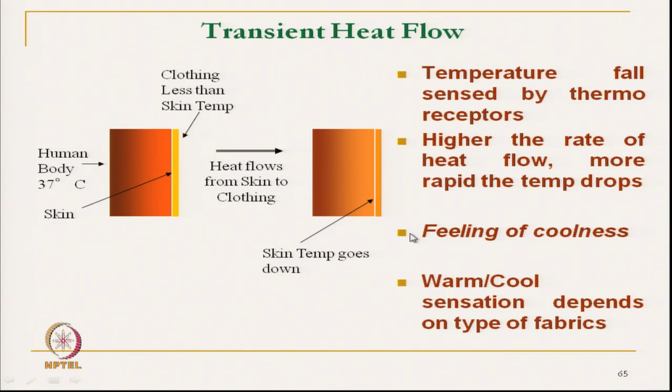If there is instantaneous heat flow, we feel cool because the temperature of our skin goes down. The rate of change in temperature resulting from flow of heat from skin to a clothing material at low temperature - the clothing material has to be at low temperature, otherwise we will receive heat.

When brought into contact, it is determined by the thermal inertia of the material. If the thermal inertia is low, then we will not feel cool. It is the material characteristics - there are many other characteristics.

The thermal inertia is a function of density of the material, specific heat of the material, and thermal conductivity of the material. If your thermal inertia is high, then we will feel cool.

If the material's temperature is lower than the skin temperature, but the thermal inertia is not high, then we will not feel cooler. Thermal inertia is a function of density, specific heat and thermal conductivity of a material which is not conductive in nature, so we will not feel cool.

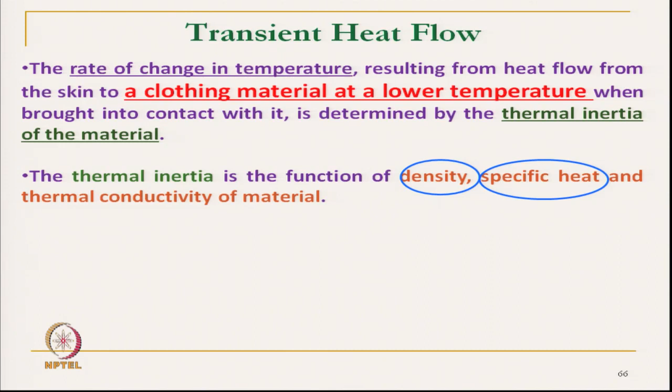Similar is the case of clothing, and we will see the various factors which actually affect the thermal inertia - the density, specific heat and thermal conductivity of the material.

Any material that can absorb and conduct heat well can easily draw away heat from the skin and we feel cooler. So the higher the thermal inertia, the cooler the feel of touch. The feel of touch is extremely important, because that material may not actually be cool.

We can see two materials, one is the cool touch material and another is the warm touch material. They are kept in the same environment, the effective temperature of these two materials is the same, but the cool touch material gives the cool sensation, the warm touch material gives warm sensation, because of the thermal inertia.

This thermal inertia is a material characteristic - for a textile material, it is the fiber polymer characteristics like specific heat, density, thermal conductivity, and also the fabric structure. In addition to material characteristics and polymer characteristics, the structure of the material, like the structure of fabric, particularly surface property of fabric, has a great influence on warm cool feeling.

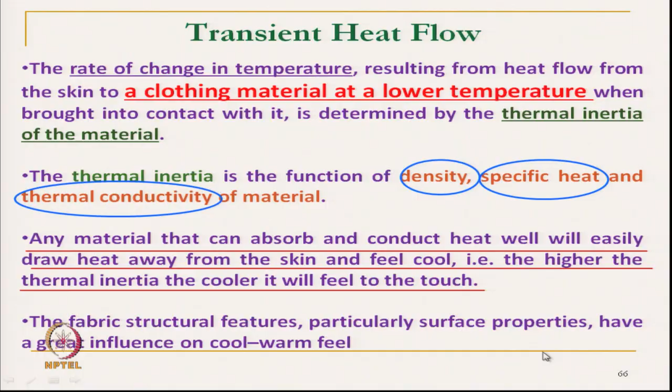Consider a simple daily example of two bed sheets made from the same cotton yarn, with the same ends per inch and picks per inch, but one is made with a 1 by 1 plain weave and the other with satin. Our experience shows the satin fabric gives a higher cool touch because of the higher contact area with the body, allowing it to draw heat at a higher rate, giving a cool feeling.

Let us look at a curve where the x axis gives contact time and the y axis gives skin temperature. Here we have a warm fabric, a brushed fabric, a smooth fabric, and a cool fabric. The sensation of coolness is estimated by measuring the initial rate of change in temperature.

So, the initial rate of change in temperature: say the skin temperature starts at 95 degrees Fahrenheit and drops to 94.6 degrees Fahrenheit. This rate of change happens initially within about 0.1 or 0.2 seconds. What is the rate of change in skin temperature against time? That tells us whether the fabric will feel cool or warm.

For one fabric, the skin temperature does not change much, so it gives a warm feeling. For the cool fabric, the temperature change is very high, giving a cool feeling.

Among the smooth and brushed fabrics, both are made of the same material and structural construction, but one is normal smooth fabric and the other is the same fabric brushed. The smooth fabric shows a higher skin temperature drop than the brushed fabric, because the smooth fabric has higher contact area.

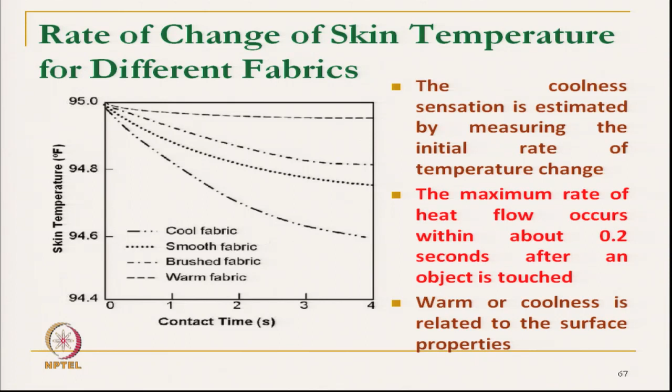The sensation of coolness occurs within 0.2 to 0.3 seconds, but what happens after that? It does not keep drawing heat at that rate, because the environmental temperature stays the same and it is an instantaneous heat change. This means a fabric that is cool to the touch, if worn for 5 or 10 minutes, will lose that cool sensation, since the instantaneous cool sensation lasts only about a second.

After that, the same fabric may not feel cool anymore, but since our body is normally not stationary and keeps moving, the fabric keeps making different contact points with the skin. Every new contact point gives the cool sensation again, so as old contact points are released and new ones generated, overall we keep feeling the cool sensation.

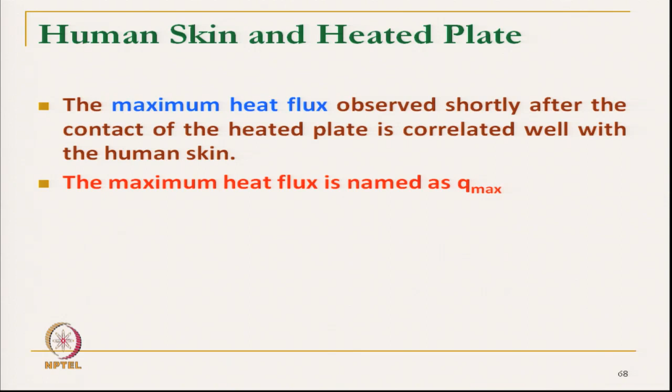This instantaneous heat flow is called Q max, the maximum heat flux, which is plotted against time. Immediately, the maximum heat flux, which is the heat drawn from the plate equivalent to skin, is what gets measured.

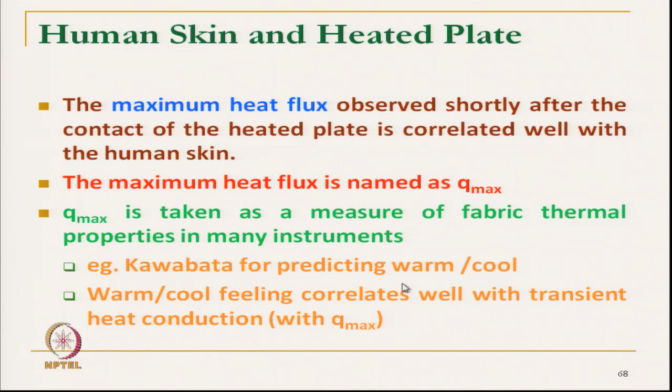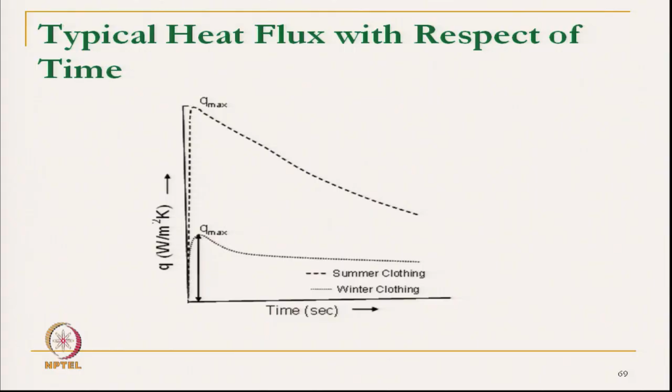For winter, if we use the same fabric, we may feel uncomfortable. So to keep us comfortable, we have to use a fabric with lower Q max. Transient heat flow should be as low as possible for warm clothing. If we want a fabric from the same type of yarn, for summer clothing we design for higher surface contact area, and for winter clothing we need lower surface contact area, which can be achieved by brushing or other surface treatment.

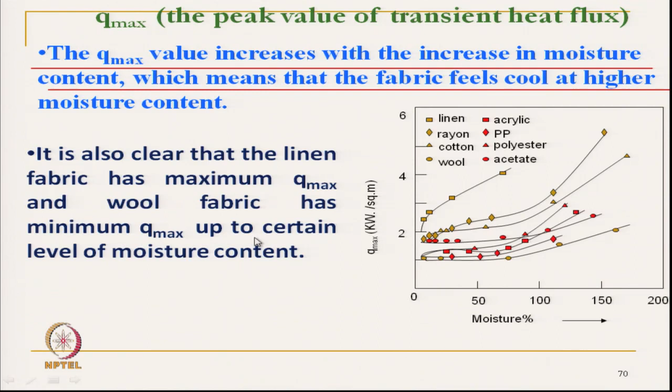It is also clear that linen fabric has maximum Q max and wool has minimum Q max up to a certain level of moisture content. This is the reason why linen feels cool and wool feels warm when we touch them, mainly due to the Q max value.

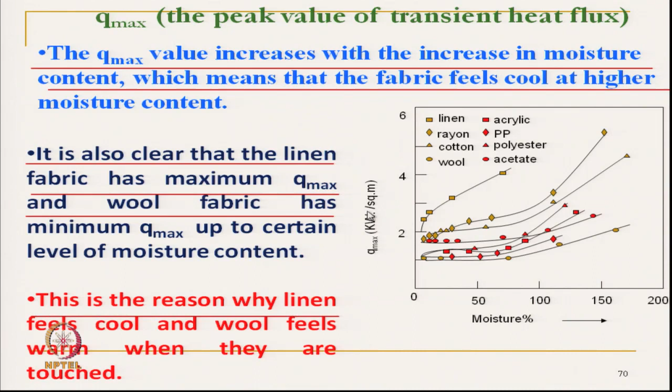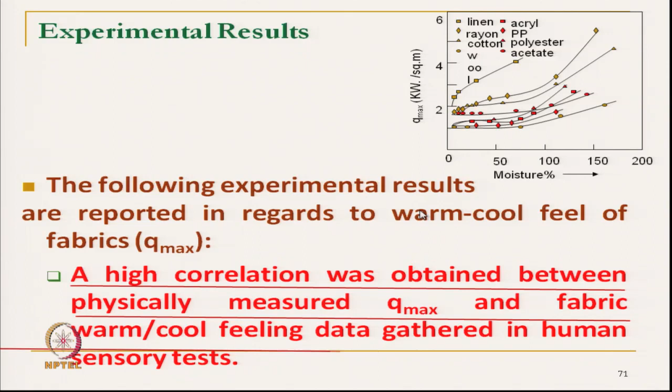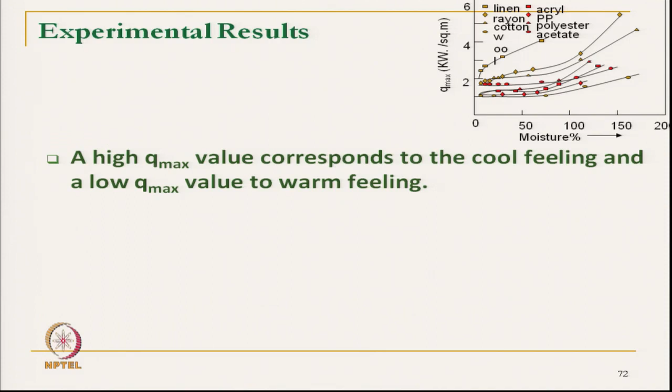A higher correlation was observed between the physically measured Q max value and the fabric's warm-cool feeling by subjective assessment. So a good correlation has been observed with the Q max value. Q max is basically an indication of the warm-cool feeling: a high Q max value corresponds to cool feeling and low Q max value to warm feeling. The value of Q max depends on the fabric surface condition, not on the number of layers of fabric.

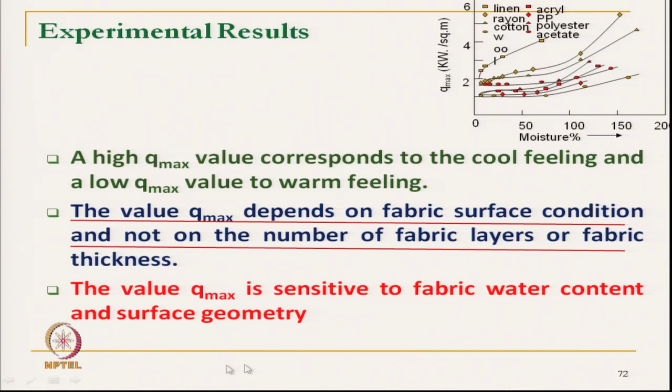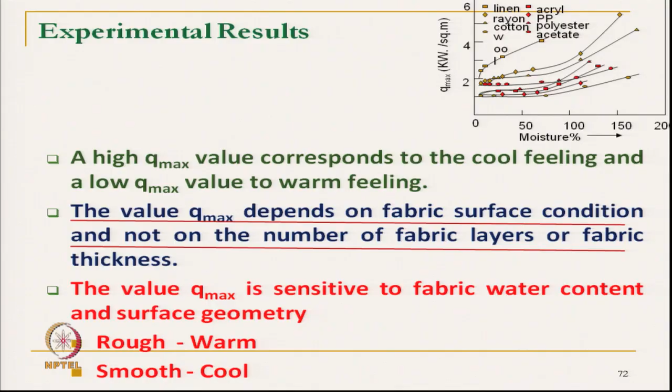Even a single thin layer of wool fabric will give a warm touch compared to a multi-layer linen fabric. It is not thermal transmission, it is instantaneous transmission. The value of Q max is sensitive to water content and surface geometry, as discussed. Rough surface gives warm touch and smooth surface gives cool touch. So a fabric which feels warm, if pressed through a calender and then touched, will give a cool feeling, due to the surface contact area. Another way of releasing heat is by diffusion.

So, the heat diffusion rate dominates when heat flows from source, that is skin to material, through heat diffusion, and it depends on the area of contact, density of the material, thermal conductivity of the material, thermal diffusivity of the material, and heat capacity.

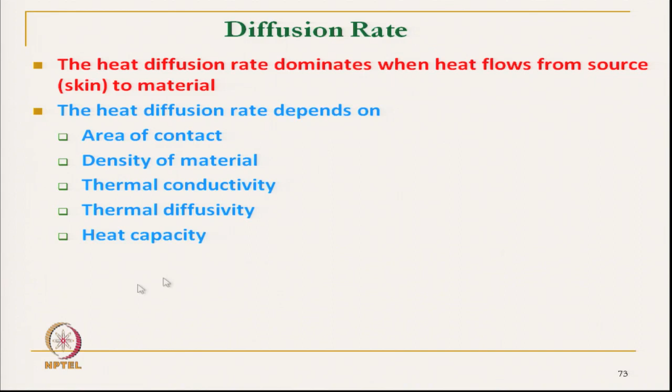It is similar to that of Qmax, transient heat. When skin is in touch with an object different in temperature, the steady temperature distribution of the skin gets disturbed, making the thermoreceptors of the skin develop warm-cool touch sensation. This is mainly due to the diffusion of heat.

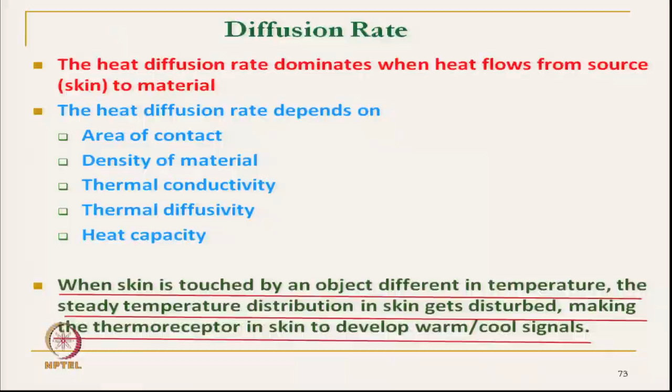So we have discussed steady state heat flow and transient heat flow. Now we will discuss how to measure the thermal transmission characteristics of clothing. It is very important to measure the thermal transmission characteristics of clothing to evaluate the suitability of a particular fabric for a particular application.

Thermal transmission is measured by the insulation value, which is measured by its thermal resistance. So if we want to know the thermal insulation, we have to measure the thermal resistance, which is reciprocal to the thermal conductivity.

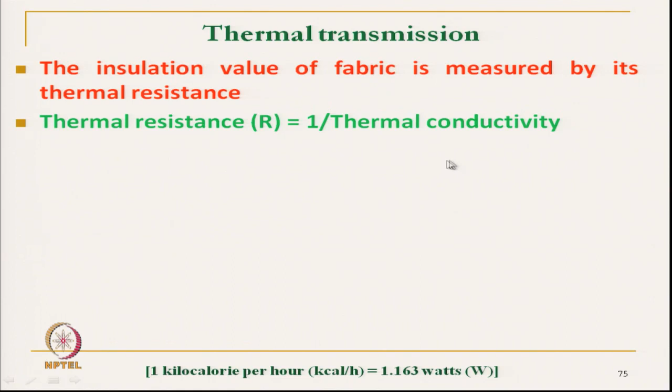We can either measure the thermal resistance or the thermal conductivity, which is watt per Kelvin, measured by measuring the total heat transmitted. But total heat transmitted may be through conduction, convection, or radiation through fabric per unit time with unit temperature difference. That is the way we can measure it. So we will discuss in detail.

Conductivity is due to both fiber and entrapped air, so it is a combination of fiber and air, and fabric thermal conductivity we know with this formula, we can measure it.

Actually measuring the thermal transmission through a material is very difficult; there are practical difficulties. So measuring airflow is very easy. We can take a channel, a pipe, and measure the quantity of air flowing, or any fluid flowing, like measurement of water flow through a pipe - it is very easy because we can measure the quantity of water flow per unit time.

But measurement of heat flow is very difficult because the heat flows in multiple directions, so controlling heat flow unidirectionally is a challenge.

Suppose I have a fabric sample, and I want to know the conductivity of the fabric. Through this fabric the heat source is there. If we want heat to flow only through this fabric, it is very difficult, because when heat is generated at a source, it will transmit heat in multiple directions. So directing the heat only through the fabric is very difficult.

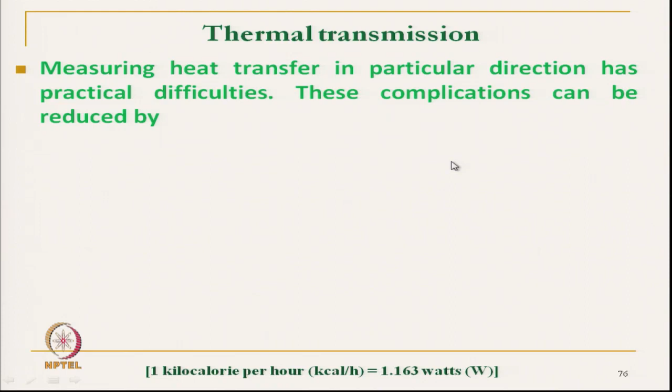But directing any other fluid, air or liquid, is very easy. So that measurement has got practical difficulties. This complication can be reduced by two methods.

One is we can compare with a standard known material. So if we know the thermal insulation of any material, thermal resistance of any material, and if we place our test sample in series, then by comparison using the standard equation, standard formula, we can calculate the thermal resistance of the unknown fabric, unknown sample.

That is comparison with the standard sample, and this technique is used in the TOG meter, which is very popular in measurement of thermal resistance of fabric.

Another method is to reduce the heat loss to the other direction. So if we can control the heat loss, then we can calculate directly. Suppose a heat source is there - if we can control the heat flow only through the fabric, restricting heat flow in other directions, then we can directly measure the heat flow rate per unit area per unit time. So these are the two approaches we can use to measure.

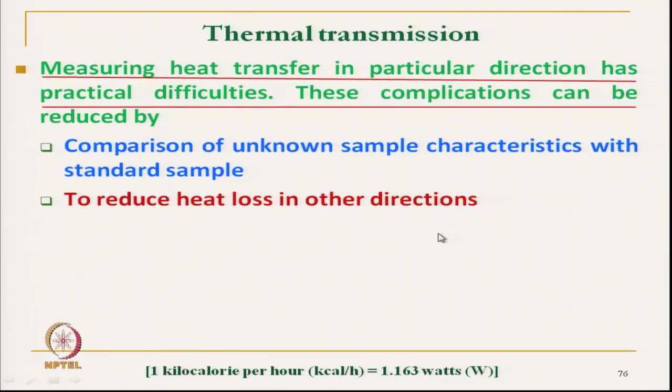So first approach, using the known sample, we can measure the characteristics of the unknown sample, which is used in the TOG meter. And by reducing the loss of heat in other directions, this principle is used in the guarded hot plate. So these two principles we will discuss, along with other techniques.

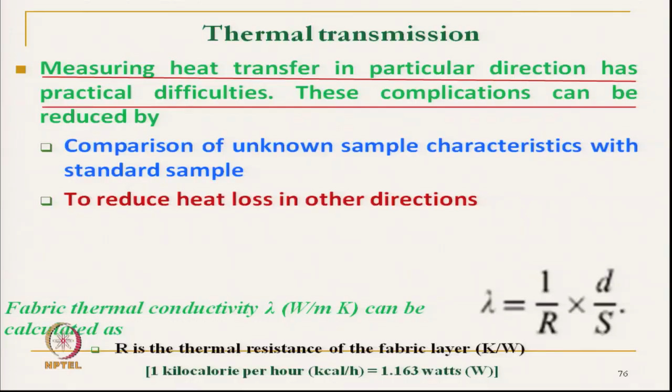So this is the standard formula as we know. Now, TOG meter - there are two types: one is called double plate TOG meter, another is single plate TOG meter. It is a two plate, double plate, two plate stand. So the method is the standard, and test sample have to be placed in series.

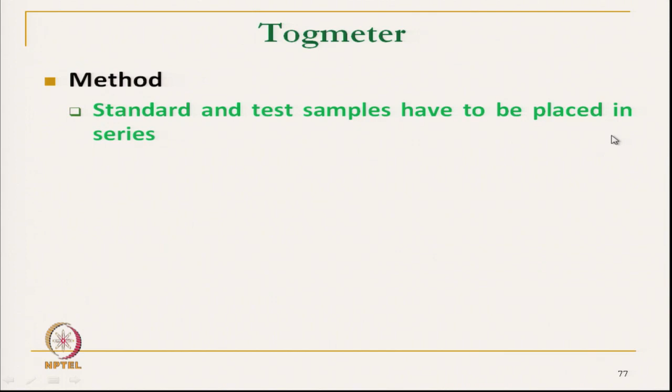They have to be placed in series, and the thermal resistance of the test fabric is calculated by comparing the temperature drop across the test fabric and the standard plate, or standard fabric - whatever we can use - but here we normally use a known plate.

So two types of TOG meters are there: one is the two-plate Togmeter, another is the single plate TOG meter.

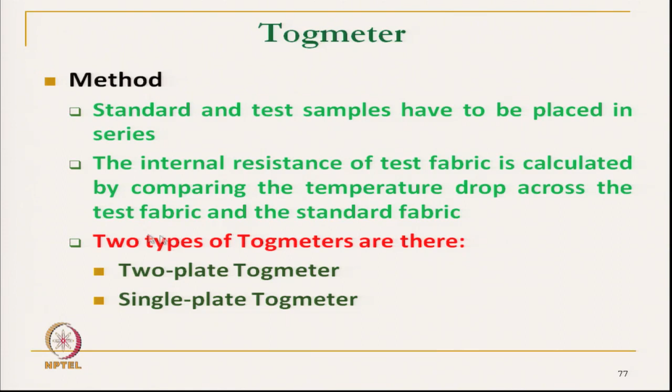In the two-plate Togmeter we use two plates - one is the standard plate of known thermal insulation, thermal resistance. The other plate is just an insulating plate to cover that. This is the top plate, used just to control any external disturbance.

In this case, the effect of air temperature is actually eliminated here.

But the problem with this top plate is that it has got its own mass, and due to its mass, the fabric which is compressible in nature gets compressed, and sometimes it gives a wrong result. Fabrics with different compressibility will give different thermal resistance values. If we assume the compressibility of the fabrics is the same, it gives a better result, but if the compressibility is different, it gives some wrong result.

So that is a limitation here, but the advantage is that the problem of air disturbance is not there. This is the bottom plate, which is a standard plate with a known thermal resistance value, and our fabric sample or specimen is the one for which we want to know the thermal resistance.

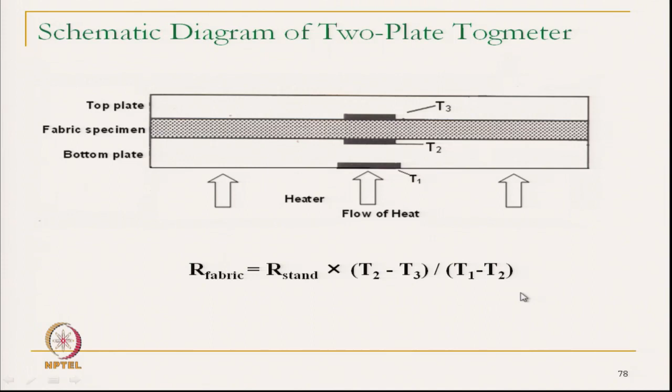That is how it works - we can get the thermal resistance value of the fabric by knowing the resistance of the bottom plate and the T1, T2, and T3 values. This is the principle of the two-plate Togmeter.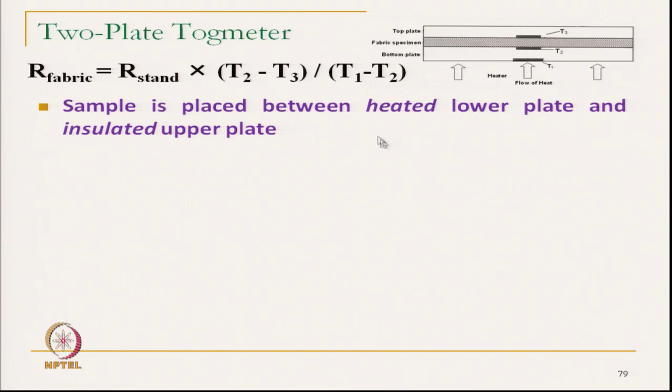The sample is placed between the heated lower plate and the insulated upper plate. The upper plate's mass should be as low as possible, just to avoid any undue compression.

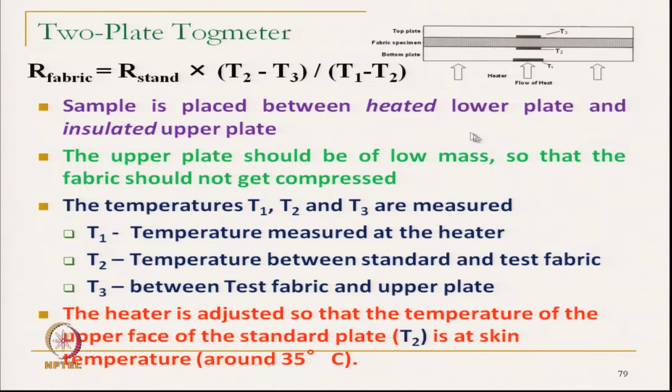These are the temperatures at different points, and importantly, the heater is adjusted here at the bottom. The heater temperature is adjusted so that T2, the temperature at the upper surface of the bottom plate, should be around skin temperature - about 35 degrees Celsius. That is how you keep the temperature of the heater.

Now coming to the single plate togmeter - here the problem of compression is eliminated. We use a single plate, with the bottom side at higher temperature T1, and the other surface at T2.

T3, which we take, is not at the surface of the fabric but some distance above the fabric layer - it takes the ambient temperature. So we have solved one problem, compression, but we have added another complexity here.

This temperature T3 takes care of the insulation of the fabric as well as the air - the air insulation is incorporated here. So we have to account for that while calculating the insulation of the sample. The sample is placed on the heated bottom plate, and the top plate is left uncovered.

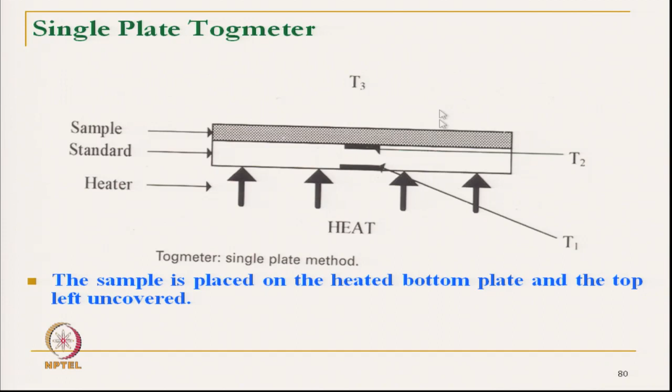The air above the specimen has considerable thermal resistance. So, initially in this method, we measure what is called the bare plate test, where we measure the thermal resistance without the fabric, just to know the thermal resistance of the air.

The air above the specimen has a considerable thermal resistance, so it sums up with the thermal resistance of the fabric. The total will be air plus fabric.

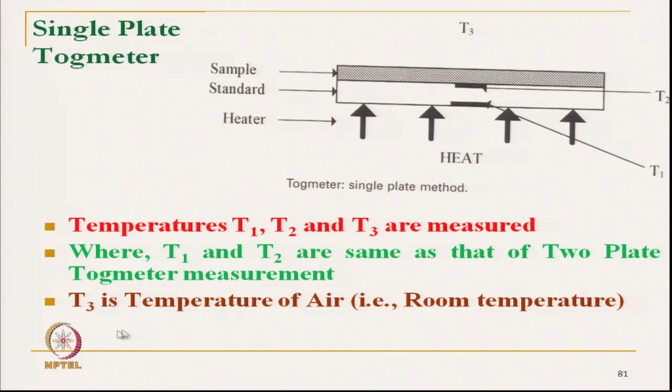So, we have temperatures T1, T2, T3, where T1 and T2 are the same as in the two plate togmeter, and T3 is the temperature of air, which is room temperature, so T3 is the ambient temperature.

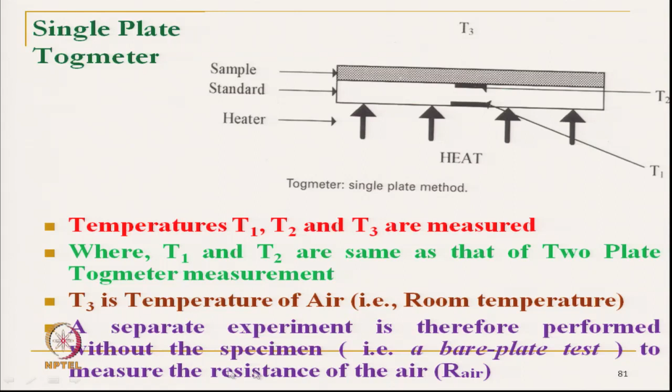A separate experiment is therefore performed without the specimen, called the bare plate test, to measure the resistance of the air. In case of the bare plate, it can be calculated that R air equals R standard...

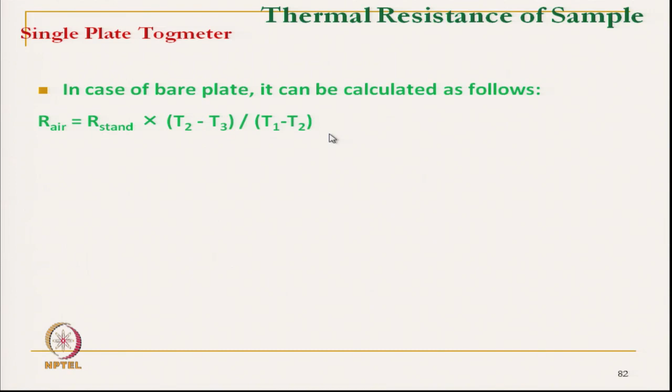...multiplied by T2 minus T3, divided by T1 minus T2. This is actually the insulation of air when we measure the thermal insulation without any fabric sample, so this gives us the thermal resistance of air, using the standard plate.

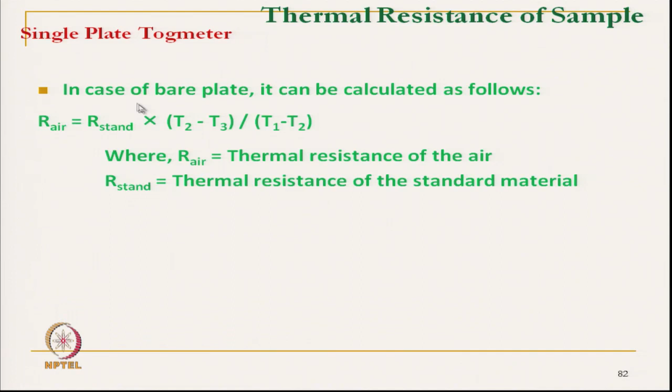The experiment is repeated after placing the fabric sample, and the apparatus is again allowed to reach equilibrium. It is important to allow the experiment to reach equilibrium, since initially the temperature keeps changing, and after reaching equilibrium the heat flow is stabilized.

After that, we measure and take the reading of T1, T2, T3, so the thermal resistance of the sample can be measured. This gives the thermal resistance of the sample compared with the standard, and after that the earlier measured air resistance is subtracted from that, so we get the total thermal resistance of the sample.

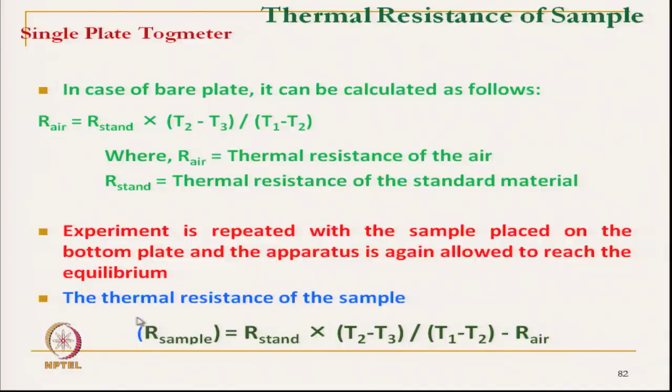This technique in the togmeter is used to compare the thermal resistance of the fabric with a standard known sample, and these samples are kept in series.

The next technique, as mentioned, is the guarded hot plate. In this technique we actually control and direct the heat flow direction through the fabric and the specimen only, and try to stop the heat flow from other directions.

Another difference is that the togmeter measures heat flow indirectly by comparing thermal resistance, which is indirect in nature and gives an indication. But in the guarded hot plate, we measure direct heat transmission - not heat resistance but the actual amount of heat transmitted through the fabric, which is the reciprocal of thermal resistance.

This apparatus has different sub-components. First is the test plate, where the actual heat transmission and the actual power drawn by the heat plate is measured, and above the heat plate the fabric specimen is placed. This is the main component of the instrument through which heat is transmitted through the fabric.

To restrict the heat flow from the test plate sideways, the lateral heat flow is restricted using the guard plate, which is typically square in shape and placed around the test plate. Another plate, the bottom plate called the lower guard plate, is placed below the test plate. The temperatures of all these plates - test plate, guard plate and bottom plate - are kept exactly the same, between say 33 to 36 degrees Celsius.

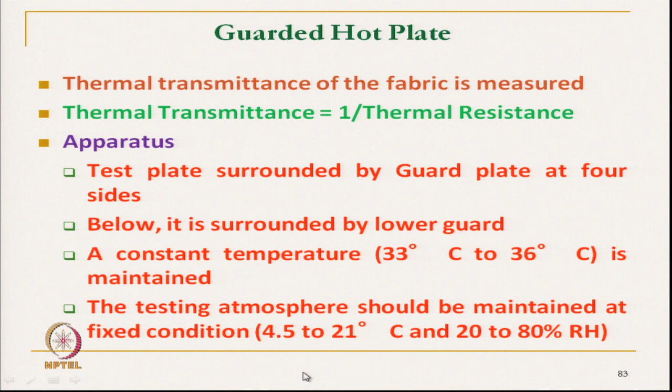The standard is to keep around 4.5 to 21 degrees Celsius and around 20 to 80% relative humidity. This is the standard atmospheric condition, where we want the atmospheric temperature lower than the skin temperature, so that heat flows through the test plate surface and cannot flow in other directions.